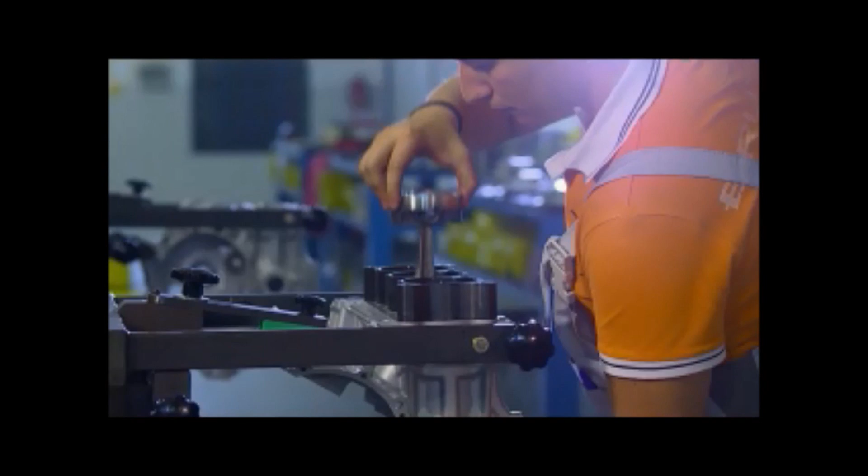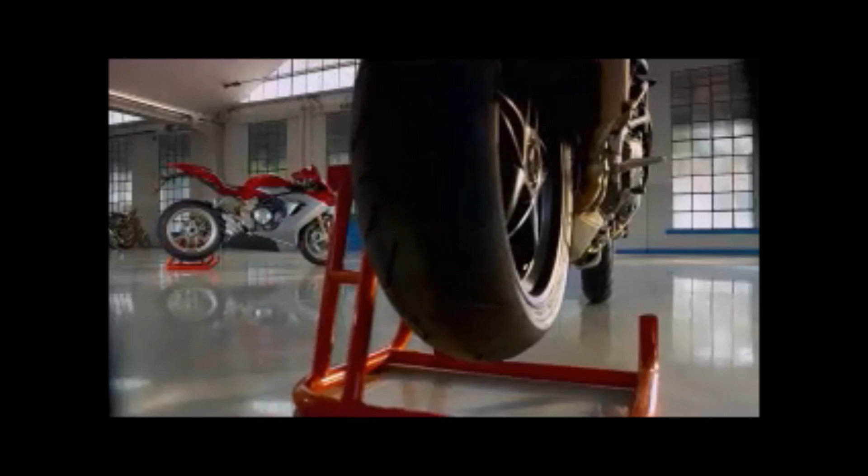Together, they decide to build a new, more affordable MV Agusta sport bike, designed for maximum speed and handling performance, on the street or on a racetrack. But can they do it? Or is it already too late?

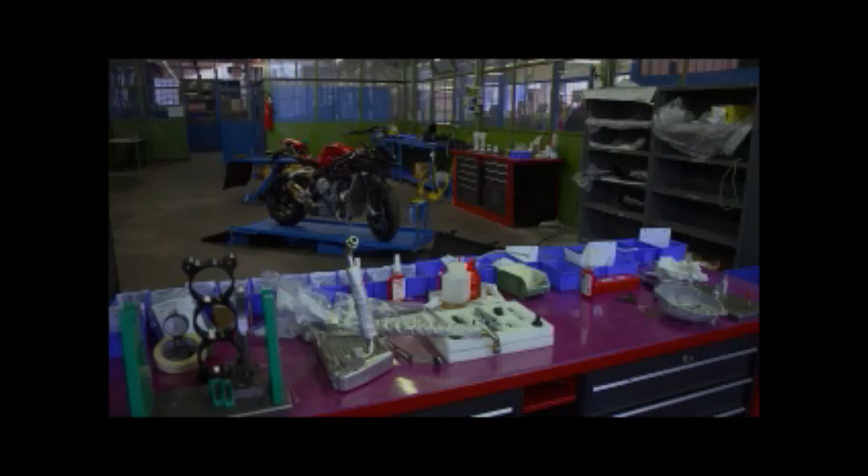Varese, Italy, home to the patriarch of a local family and his son, Claudio and Giovanni Castiglioni. Their company, MV Agusta, is at a crossroads, because sometimes Claudio's passion for what he calls motorcycle art blinds him to reality. Claudio tried to do things without thinking whether it would be profitable or not.

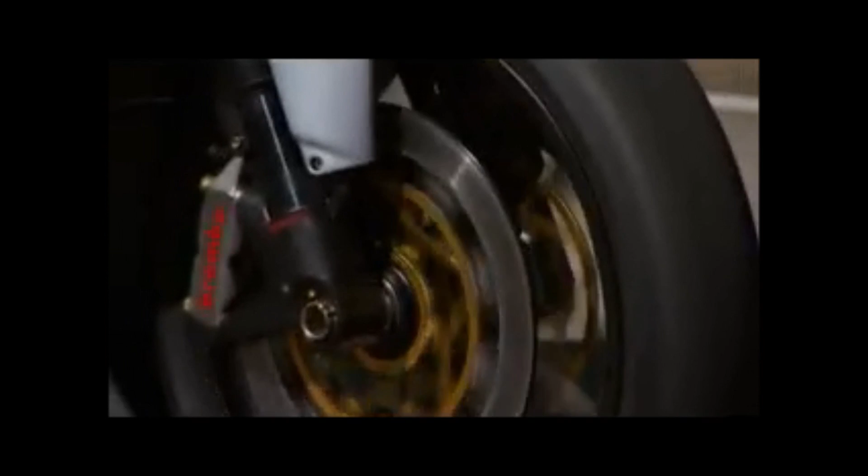When the Castiglionis buy MV Agusta, the first sport bike Claudio builds is the F4, with a large four-cylinder engine. It's exotic, expensive, and clearly Italian.

We're going to the experimental site. I don't have the key.

It's our top range. It's the best of the best. It sells for twice as much as the average motorcycle, and more than some cars. Over 200 horsepower, 201 exactly, 0.2. It's fully equipped with the latest technology.

The market for very expensive motorcycles is small. A bad world economy only makes it worse. I think it's one of the worst moments the motorcycle industry has seen in the last year. So if you have new models, a new market to challenge, that is the key to surviving.

So father and son decide to create a less expensive three-cylinder bike. They simply call it the F3. Claudio is betting it all on the F3, a bike designed to match competitors' prices, but still carry the MV Agusta mystique.

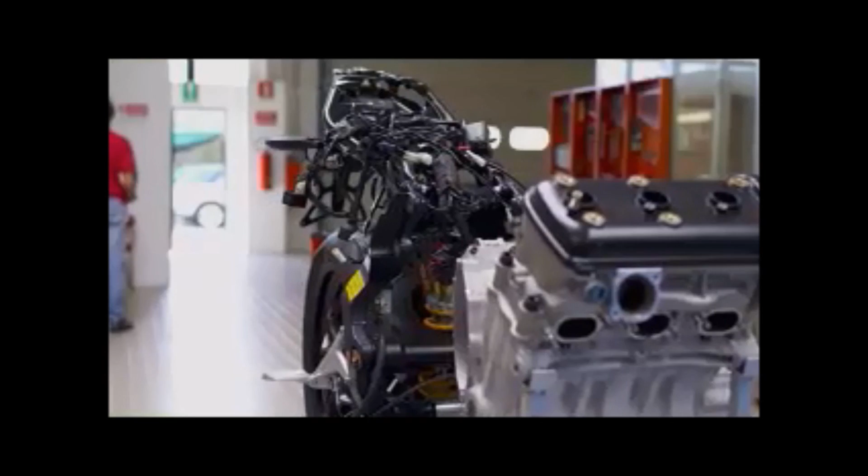Adrian is a great designer. He has quite a difficult character because you have to be careful when you say, maybe I don't like this so much, but look what he did.

Claudio is less concerned with feelings at the design studio. He lets everyone know what he thinks and what he wants. I generally get the impression that he's waiting until 7:30 in the morning so he can call me, because sometimes he really genuinely has called me before getting into work to tell me, you know, oh, I'm not too sure about this, I'm not too sure about that.

How to develop the body, the shape of the bike, that is the focus of Claudio, and that's what Claudio is doing. He has incredible views, visions of the future.

It takes several years to finalize the F3's body, frame, and suspension. This is maybe four years ago. It's an idea of, we had the engine and we say, let's see how we can fit it in a bike. This bike was done by my father, who loved to be a perfectionist.

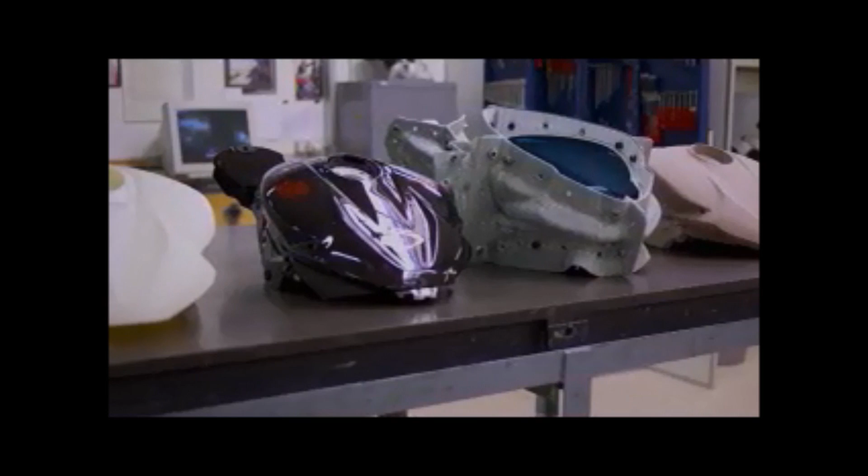Designing the overall shape of the F3 is followed by designing the individual pieces of the bike. This is Giancarlo, one of our model makers. He's doing some final surface finishing to a fuel tank. I think it's important that this hands-on aspect remains, because it really does make a difference in how you perceive the final component.

Fundamentally, an MV Agusta should be sexy, and I think this fuel tank, when it's painted, looks sexy, dare I say.

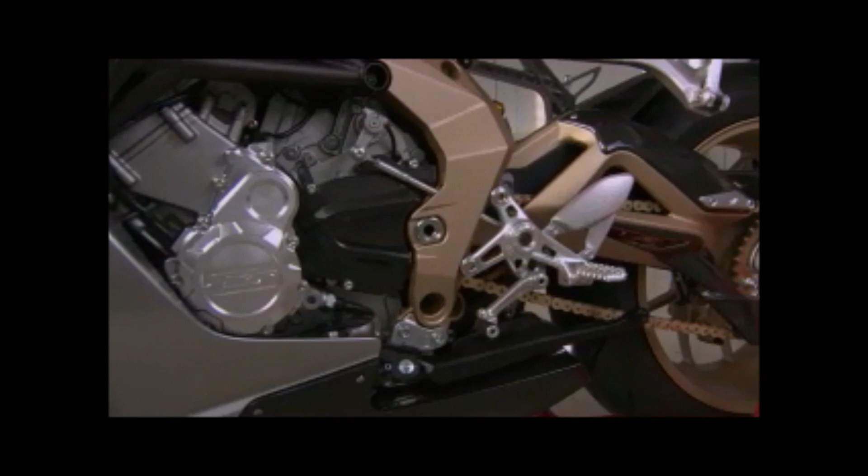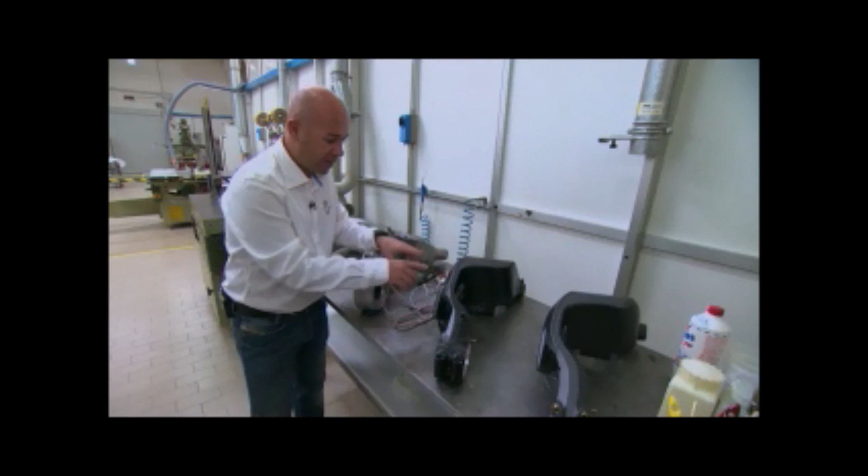They follow the same process from a basic model to a handmade finished piece for every part of the bike, including the swing arm, which connects the frame to the rear wheel. This, in a way, sums up our design process, starting from a design model. From this styling model, a component is handmade in metal and applied to a test bike. The technical layout of the bike, the frame, the swing arm, and the wheels, are the first components that need to be constructed before we can move on with the styling.

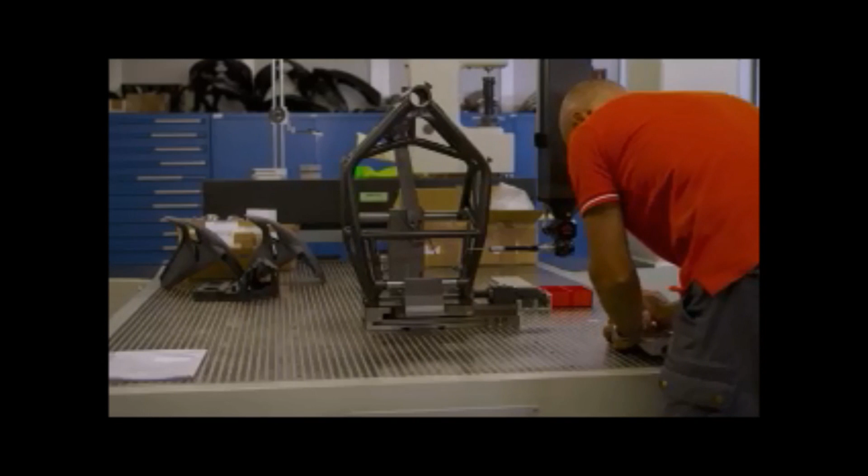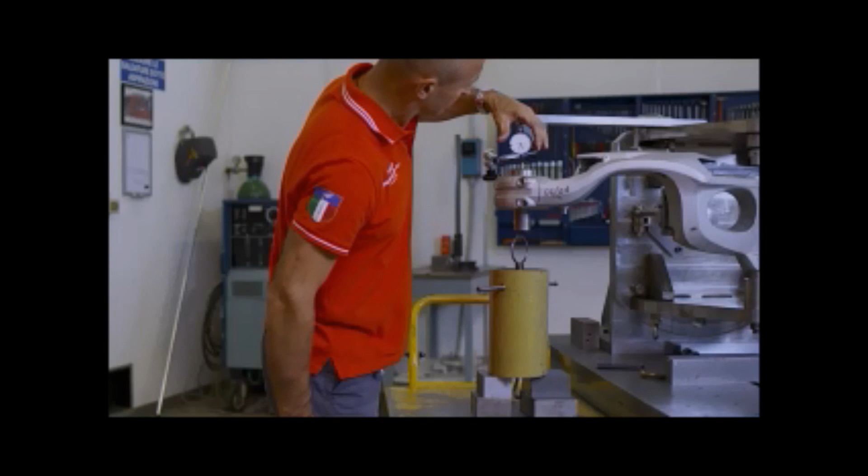Then they scan every part into computers. Here we can see the design of the rear swing arm that we saw in the workshop. They test in the lab, but the best tests are on the racetrack.

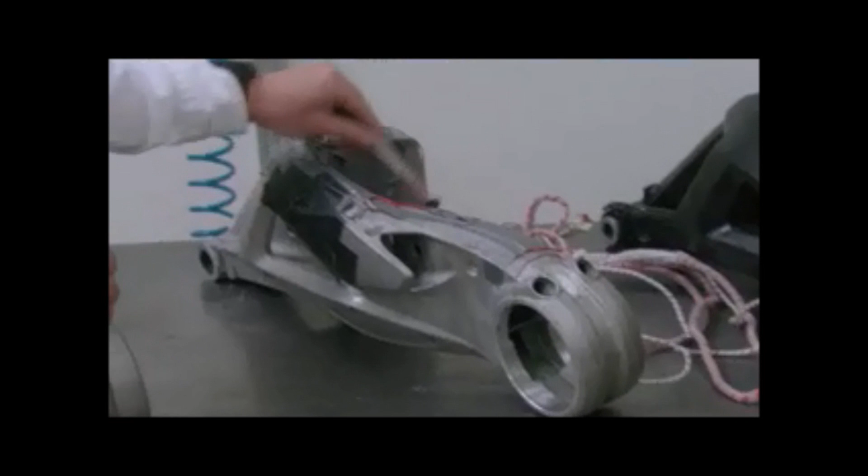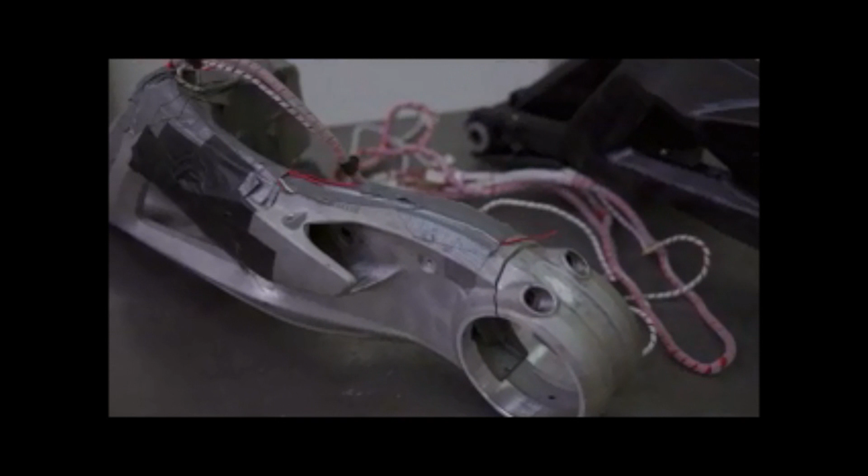Surprisingly, going flat out on a racetrack isn't the most stressful time for the bike's structure. The most severe condition, as strange as it seems, is not when you ride at high speed. The most severe forces that act on the swing arm and frame is when you hit a big bump on the road at low speeds.

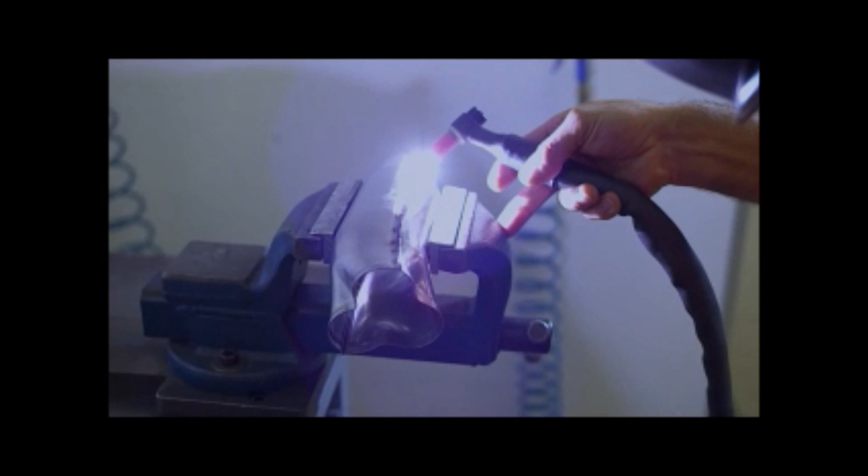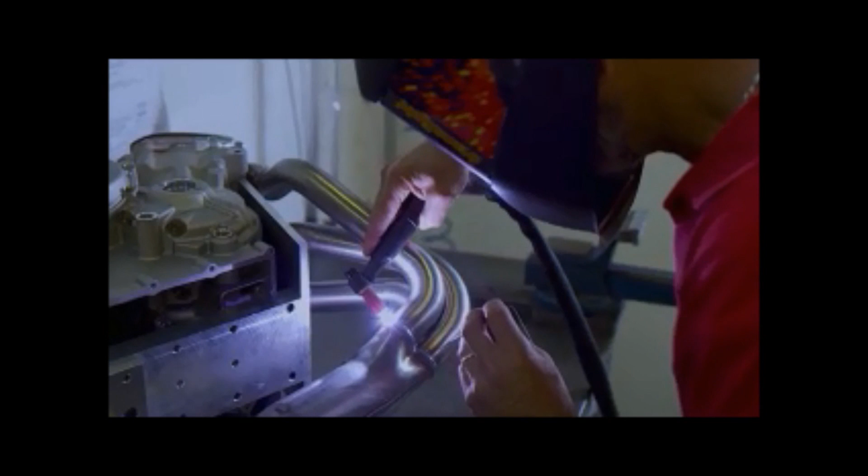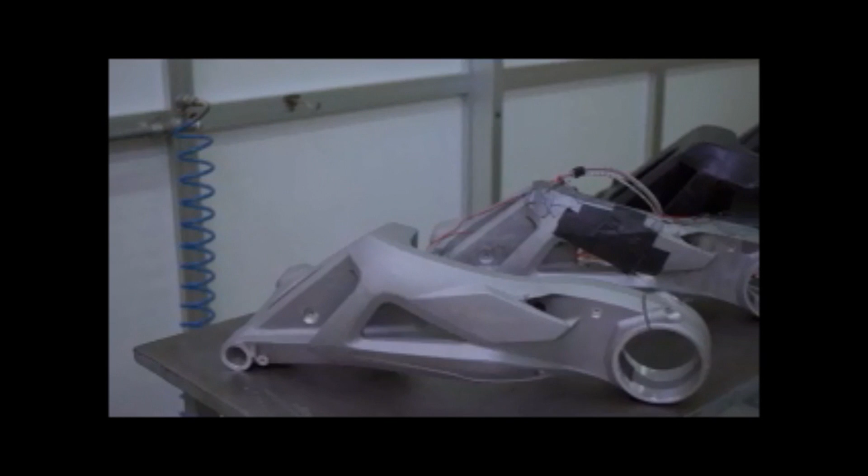At MV, form not only follows function, but beauty. The characteristics of the length and the rigidity of the bike will have an impact on the dynamics of the vehicle. But obviously it has to look great as well. So the styling is fundamental to something on an MV, like the swing arm. You know, a swing arm on an MV Agusta should be something really quite special.

Computers fill the second floor of the building. Here, 12 people spend a full year converting the F3 into digital files. They begin with individual parts, like the fuel tank, then move on to the entire motorcycle.

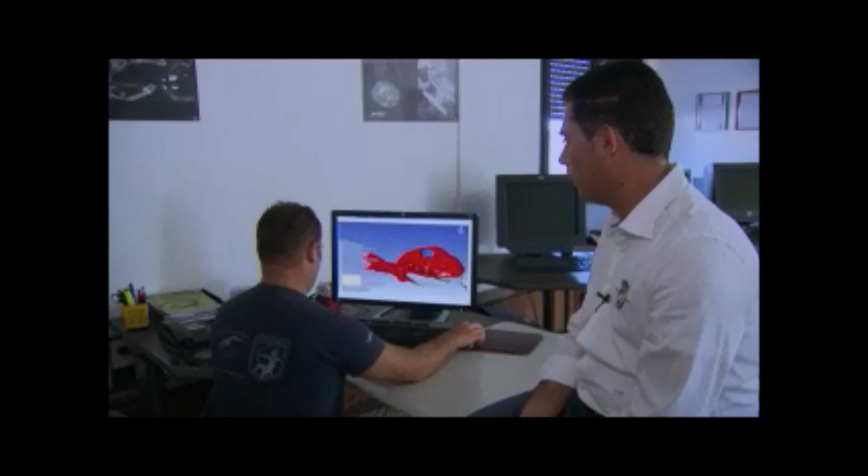The F3 model is a real compact bike. For this reason, we have a real small dimension of the fuel tank, and to achieve some capacity, we had to build an extension of the fuel tank on the rear part. The F3 is so compact, they need to use the area under the seat as part of the fuel tank.

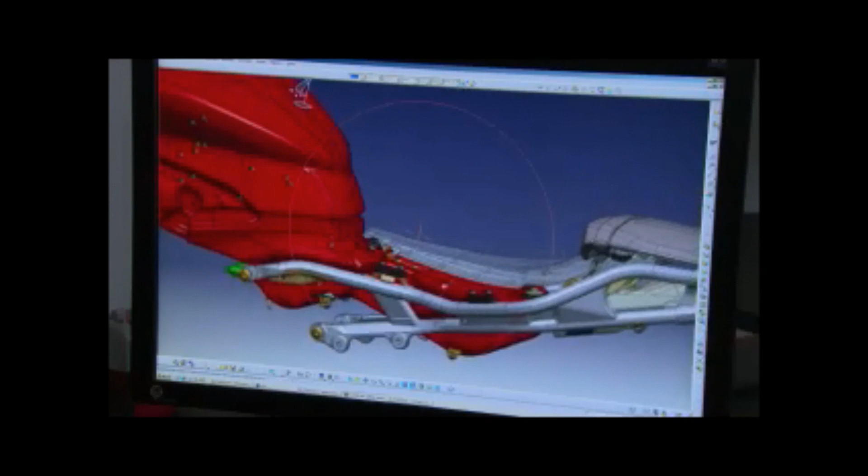This is the saddle for the rider. Inside we have a fuel tank.

It's time for science to meet art. Designing the F3 is a strange combination of high-tech software and classic sculptor's tools used to create a full-size model of the bike out of clay.

How it starts off life, if you like. I mean, it's just like a brick, if you like, this solid material. And then, step by step, the bike comes out. We apply this clay material on the structure, and that basically forms a starting point.

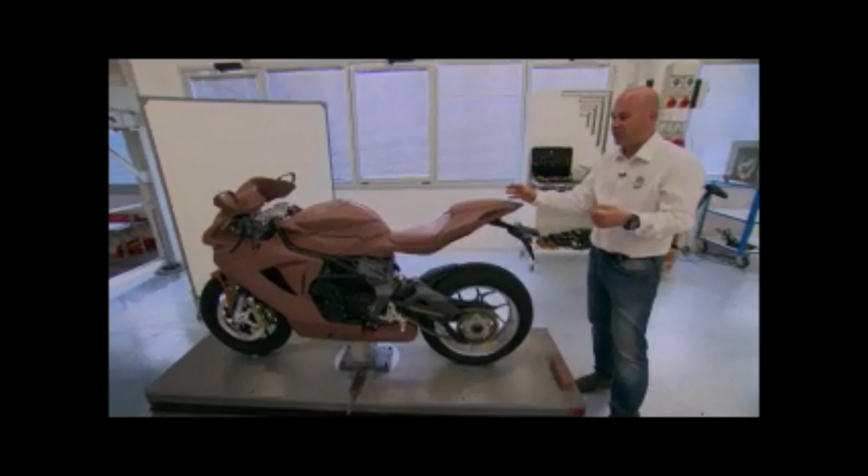The clay is about the styling, but it has to fit around all these fixed points. All these things have to be considered when you're actually designing the bike.

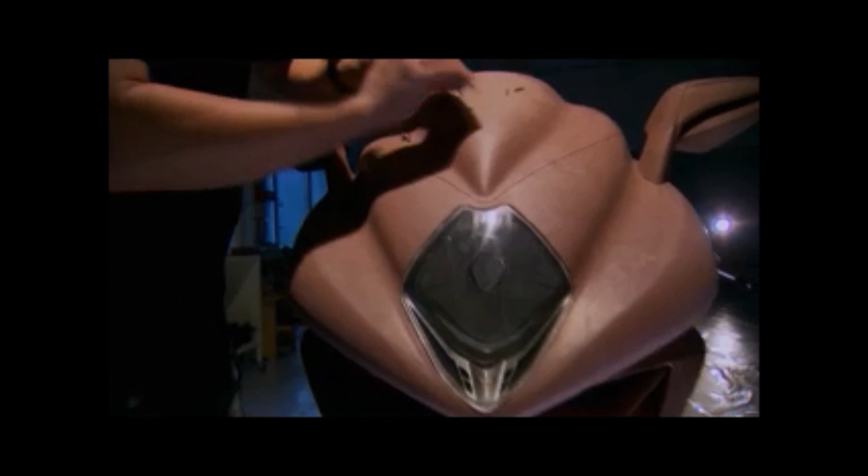From day one on the F3, we started off with the technical components. It forms a skeleton of the bike. It's like creating a person. You don't start with the skin, you start with the bones, if you like.

The cool thing about having a clay model is you can actually sit on it physically and you can, as a designer, get a feel for what the bike's going to be like. The best thing about this kind of actually riding a bike is you can check all your positions.

And I love motorcycles. I'm not just a designer. First I loved motorcycles, then I became a designer.

Claudio and the F3 are stars of the 2010 Milan Motorcycle Show. The F3 is voted the most beautiful bike there. So far, the Castiglioni father and son plan is working.

We have clients that are 18 years old with the new F3. A few years back, these kids, they were kids. They didn't even know what MV was, because MV was closed for 30 years. But fate is about to turn the MV world upside down.

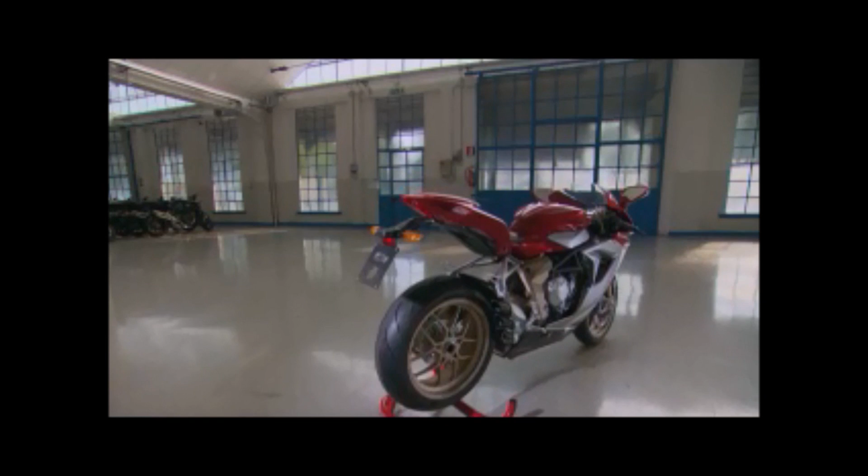The MV Agusta F3 is Claudio Castiglioni's latest masterpiece. But as destiny would have it, he never gets to ride it.

In August 2011, just weeks before the bike is scheduled to go into production, Claudio Castiglioni dies.

You think about, oh God, what do I do now?

Until the very end, his dream consumes him. The last conversation, and he was not far from his death, maybe one day before. So we talked about the bike a long time, till the end. I always said, for me it's impossible to think of a life without my father.